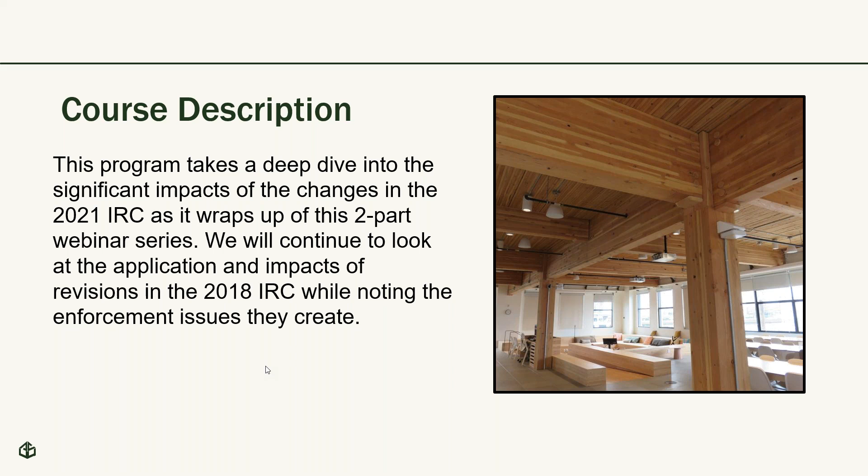Now, one thing about the splitting of these presentations is we actually did talk about ESS, our energy storage systems, things related to electricity, and all of that. We're continuing on with that. This happens, to me at least, to be one of the most interesting code changes I've ever seen in the residential code. As I mentioned in part one, I was the original drafting secretariat. I got to work with all of the committee members and the membership in the development of the 2000 edition. And this particular item kind of steps outside, to me at least, the scope of the International Residential Code.

We are talking about using electric vehicles to power dwellings, certainly in the event of an emergency. I wouldn't believe that it would be on a regular basis. But if there's a power outage or something happens to the grid, to the supply that comes into the dwellings, we can actually hook up our electric vehicles and run our homes for a period of time. I have talked with people about how long that is. Like I said, this is very interesting to me to see this in the International Residential Code. But people mostly fall on about 3 days, depending on the load that the dwelling has. Could be more, could be less, depending on the drawdown that each dwelling has, depending on all the appliances and everything that uses electricity. Very interesting to see this.

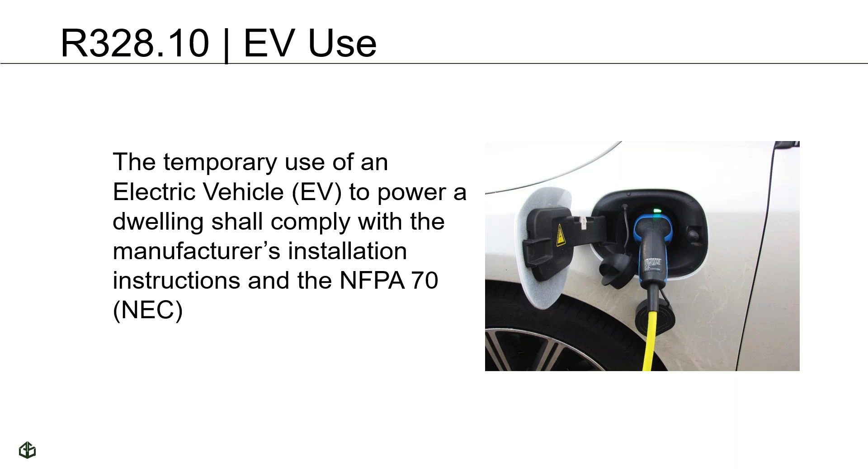Like with any sort of appliance or piece of equipment, we have to make sure that we are complying with the manufacturer's installation instructions and, of course, the electrical code, NFPA 70. The industry has done a lot of work, as we mentioned in the last webinar, on including energy storage systems and other sorts of criteria in the residential code and in other codes now. And we have that available for us to use. People can now, based on this particular code, use their electric vehicles in a different way to actually power their refrigerators and whatever else they have in their home that runs on electricity. Very interesting to see this.

Continuing on with our energy storage system, this is kind of a funny one to me. We've had more of this occurring through the codes where we actually have to have a copy of the manufacturer's installation and operation and maintenance criteria, but not only that, but how we can decommission these systems, provided to the owner. And then it does say, or placed in a conspicuous location close to the energy storage system. That's actually the wording out of the code. We don't know what that means. Conspicuous location means different things to different people.

So we're going to have to see these types of documents hopefully get into the hands of the people that are going to be using these systems and hopefully maintaining them moving out. The other thing that this particular code section does is it also requires a label on the energy storage system itself of contact information for qualified maintenance and service providers. Could be singular, even provider. It doesn't say who that is, doesn't say what qualifies them to work on these particular systems. It just says that they have to be qualified.

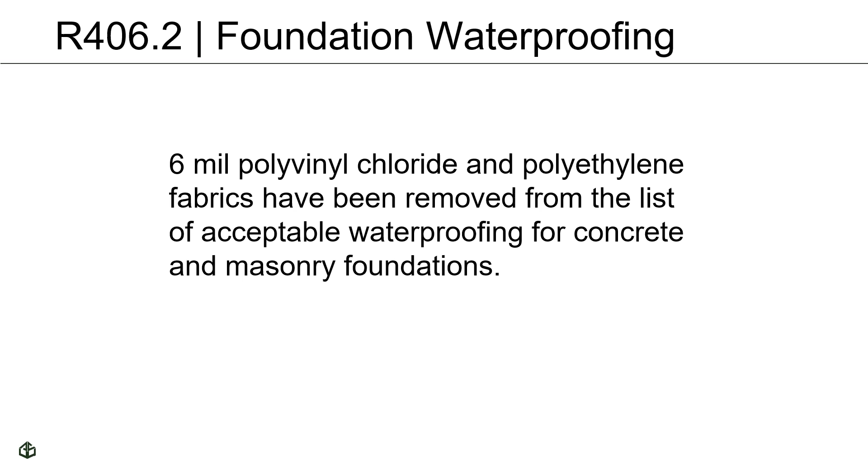Here is another very interesting code change, and as I said in the first part, I find all code changes interesting, so bear with me. I'm sorry if I use that term an awful lot. This one is one that's going to be a challenge, I think, certainly for our contractors out there, and I hope they know about this.

But the 10 mil vapor retarder underneath concrete slabs is now the requirement. Previously, it was 6 mil. So we're actually increasing the thickness. We get that, and we have the standard lapping of the joints and all of that. But there could be contractors out there that have a stockpile, probably not a ton, but I'm sure they have quite a bit of 6 mil types of fabrics that would be placed as vapor retarders. So what can they do with that particular product? 10 mil is the minimum.

Well, in talking with people and going through the code development process, what was found is that they can double up, obviously, on the 6 mil. We asked if 2 layers of 6 mil could be used and would actually get the performance underneath our slabs that we're looking for, and the answer was yes. And so when you go out there, inspectors in the field, and someone is using a 6 mil vapor retarder, you can just say, the code has changed. All you need to do, though, is double up on the 6 mil and you're in good shape.

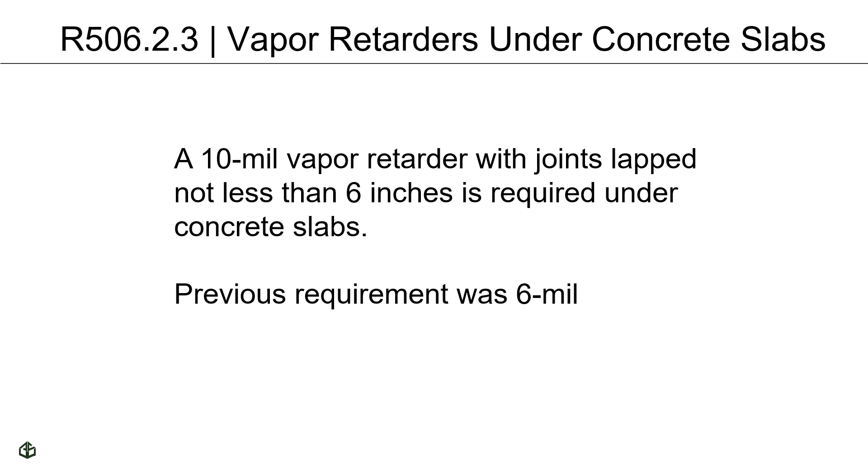Deck loads. You will see that there are a lot of code changes related to changing the criteria for the construction of decks. The prescriptive criteria in the codes has been around for some time. We started to specify deck construction not too long ago, and we've had to change certainly some of the loading criteria, some of the other criteria that we apply to the construction of decks, because this is one of the most popular types of projects that are out there, certainly for homeowners to do on weekends with friends, what have you, is to construct a nice new deck serving their dwelling.

Well, we have new loading criteria that we have to deal with. This particular slide applies to footings, but the design of other criteria is based on a 40-pound live load or 50, 60, or 70-pound ground snow load. Well, that's great, and we have lots of tables, lots of prescriptive criteria to take a look at in this regard. However, we do know that some jurisdictions have increased the live load for decks and balconies based on a perceived lack of performance of those particular elements.

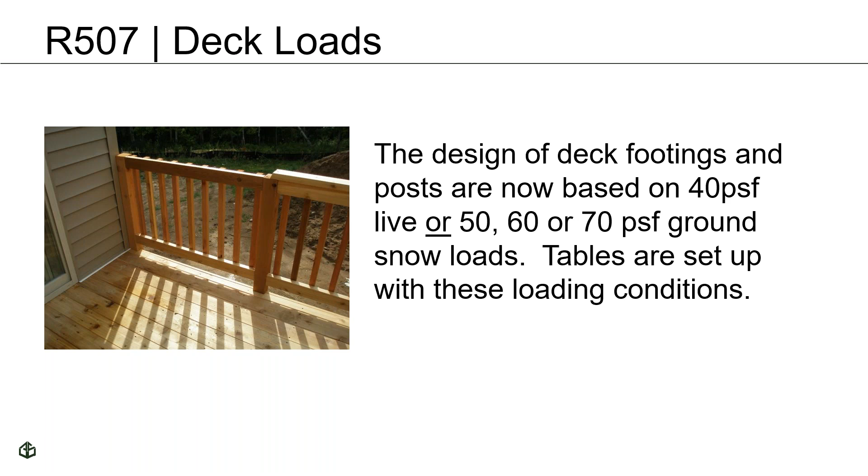Deck posts. We were looking at the footings, we're moving up in the construction, we're at the deck post now. The table for deck posts has been added, very nice to have in the code. We have almost, I think, a complete set of prescriptive criteria for the construction of decks now. Very, very handy. It is based on the loads that we just talked about, so we're going to have to take a look at that too, although the posts, for the most part, shouldn't have that much trouble, but we're going to have to evaluate that as well moving on into the future.

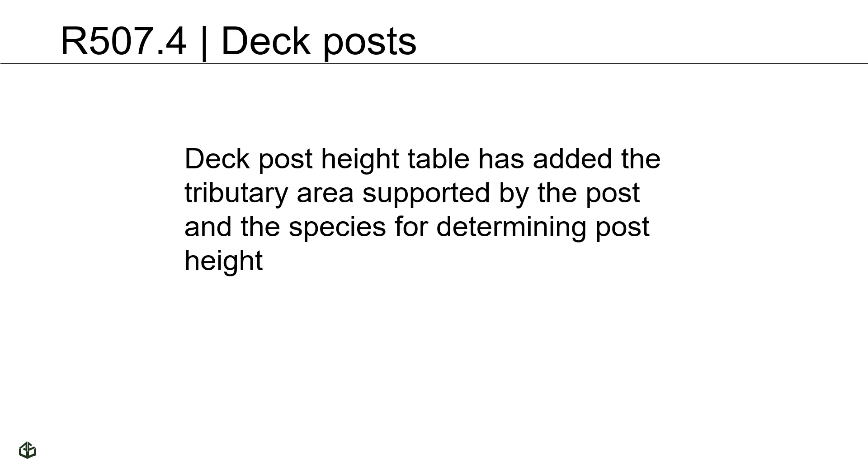One thing I forgot to mention, certainly for the jurisdictions out there, is if you have or want to have a handout for the construction of decks, you should really take a look at this particular section, section R507, and either amend what you have now or build it into a handout. There's a lot of jurisdictions out there that have handouts for deck construction. So there's really not that much that's new under the sun. You can reach out, talk to them about maybe getting a copy for yourself.

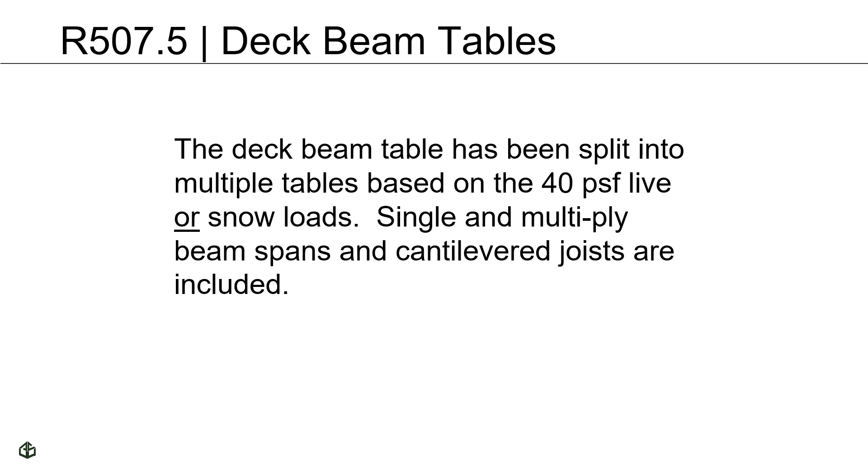And then you can put certainly your jurisdiction's logo, letterhead, things of that nature on there and make it your own and put it on your web page for people to use moving out in the future. Very, very handy to have that. There are some jurisdictions, like I said, that go to a lot of effort to create all kinds of handouts for people to use.

Deck joists, okay, we have more options now. We've got the ability to have greater cantilevers over the beams. A lot of work has gone on with this. There is an organization that represents groups or contractors that build decks, balconies too, presumably, but decks more specifically. And they've been very involved and done a tremendous amount of work on this particular criteria. And it makes it very easy, again, for people to use.

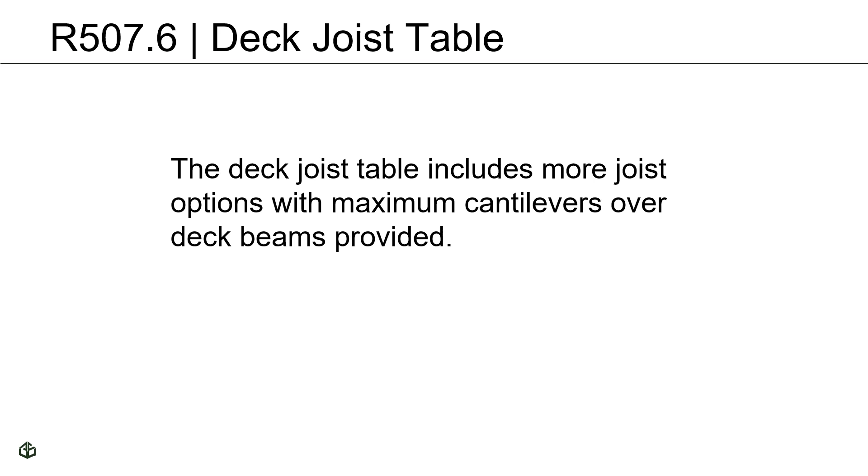And then the decking, okay? The decking table has been updated. We've got a nice set of criteria. I think it's a little more clear to use now. We have single and multi-span configurations, and then we can also use diagonal decking. Not everybody wants to have their decking perpendicular to the joists that they have built into place. And so we can actually have a diagonal pattern built into these decks now.

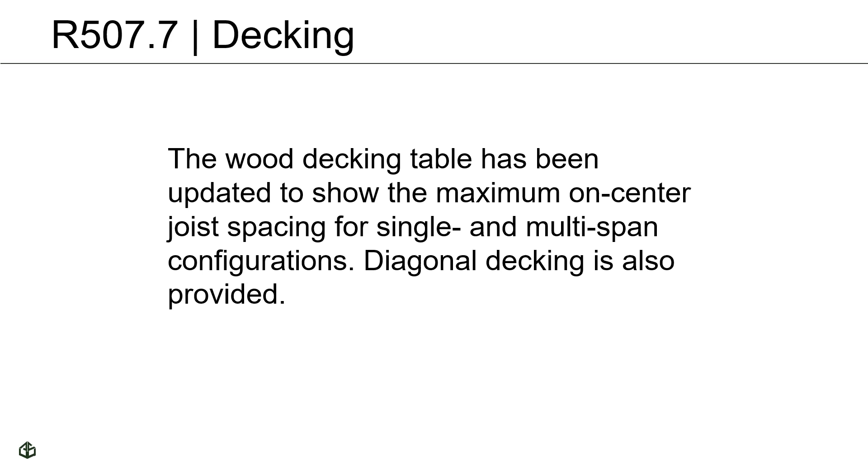Again, they're adding more and more to make this decking criteria much more usable for people building decks, certainly for the homeowners, I think, and for those framers out there that are building decks prescriptively. Here is one of the tables in particular, some criteria related to the maximum joist spacing. This is specific to the decking material. You can see that we have 1 1/4 inch wood and we have 2 inch wood as the decking material that can be used. And then, depending on the application of the decking itself, you can actually create the actual structure of the decks that you're building.

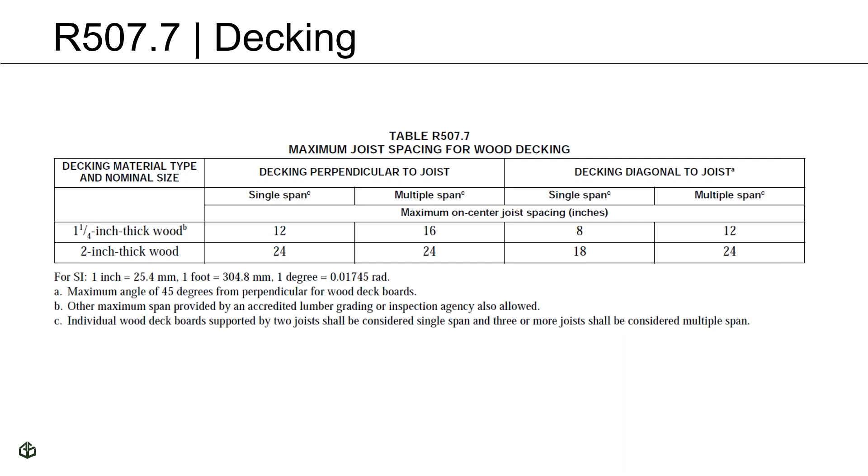And then I think this might be the last slide on decks, section R507.10. We even have a section for our guards. I used to say guardrails, but it's more than that now. And this particular section has been included to provide criteria for not just wood, but for our plastic, composite, and other types of guard material that are used out there. I try not to use manufacturers' names when there are other manufacturers out there for products, but you know who they are. We're starting to see people use those more and more for deck construction because they hold up pretty well out there in the exterior environment.

Okay, we've moved out of chapter 5, and we have basically 10 chapters that we're going to talk about today, plus a few appendix chapters. So we're moving along, and we're doing actually very well, I think, certainly for our particular webinar here.

As I mentioned before, industry groups have been constantly evaluating the performance of all sorts of criteria in the codes based on their particular product. This is for wood construction, obviously, and I'm with American Wood Council, so we're very interested in this, and our people have done a really good amount of work bringing in the additional types of connections or fasteners, if you will, that can be used for roof and wall construction.

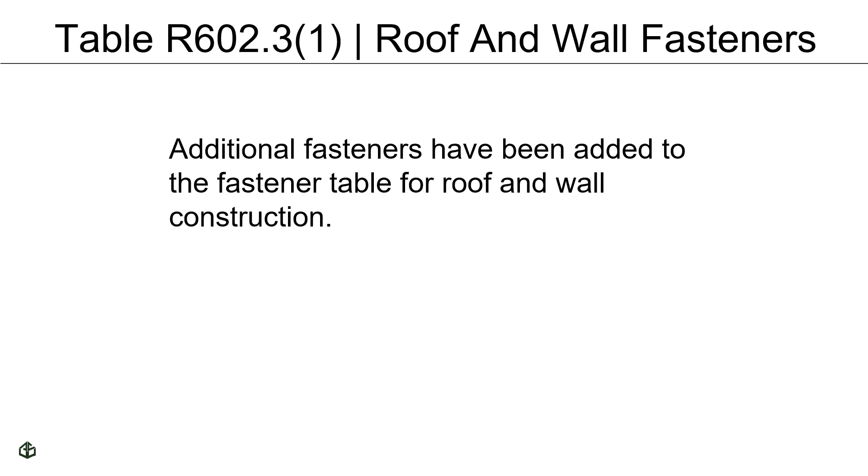Here we are. Okay, you can see here's some of the changes and all of that. We've actually built in, certainly in this case, our 3/8, 1/2-inch wood structural panel type of fastening situation with, in this case, nails or ring shank nails, things of that nature, and we can just have more flexibility in the types of fastening, types of connections that we need to create wood structures.

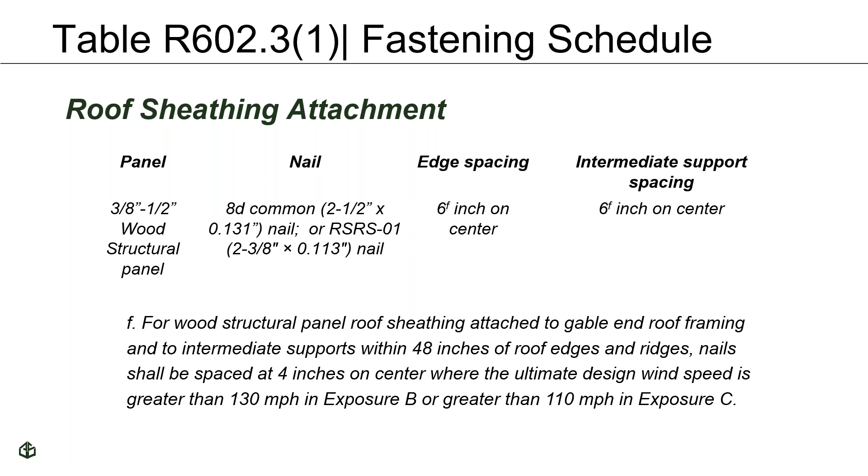Here we have another one, item 12 in the table itself, adjacent full height stud to the end of the header. You can see this is a box header, a built-up header, that kind of a thing. And we have prescriptive criteria in this particular slide that is found in the code. Unfortunately, some of the formatting of this slide got a little bit funky under the nail section, but each of those items are the fastening, if you will, condition that can be used for this particular situation that we have in front of us, the full height stud to the header.

Okay, so you can use 4 16-penny box nails. You can use 3 16-penny. Hopefully I said 16-penny for the box nails. Common nails too. You could use 4 10-penny box nails or 4 3-inch, basically, you can see the diameter of the nails themselves. And so we have all of that listed there just in case you have those much more available than other types of nails. And you can see the location is called out in the spacing location criteria. It's an end nail kind of configuration.

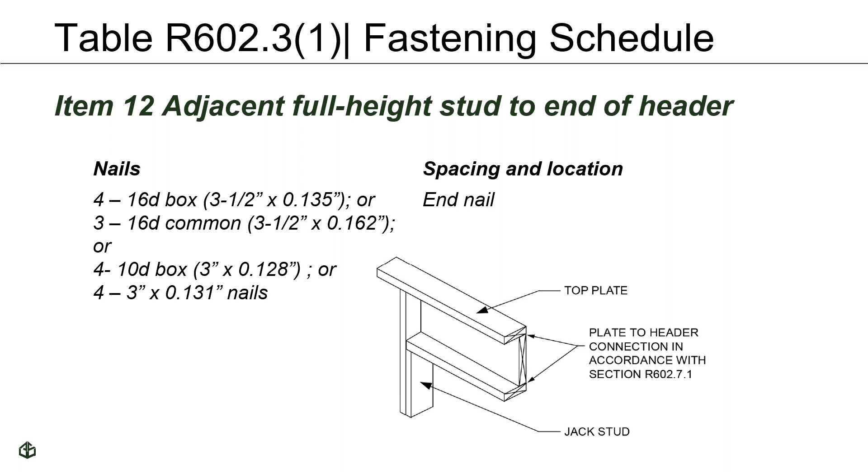This really brings up an interesting point. If you're planning on or you're about to take any sort of certification exam through ICC, whether it's based on the residential code or the building code or what have you, always, always, always be familiar with the footnotes. These certification exam members, they meet and they like to make you think a little bit. Okay, they want to make sure that you know what's going on. And so they frequently will use a footnote, maybe a caption or whatever, as part of the answer to the certification question that's in front of you. Okay, so always, always, always study, at least read through the footnotes, be familiar with what they are so you're not tripped up on any particular exam question.

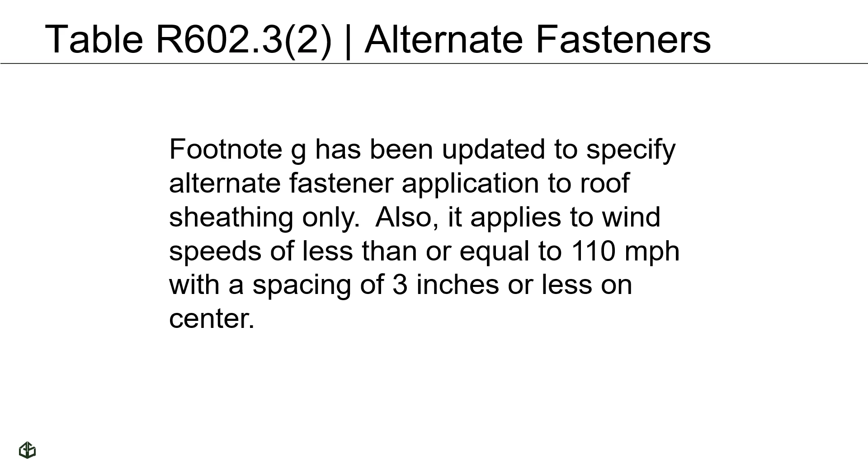Cripple walls, again, in that second line, you can see there's that C word, clarified. The criteria applies only to exterior cripple walls. Interior cripple walls, you know, we have some criteria for that. We don't have to worry nearly as much on the interior application, because in most cases, the exterior walls are load-bearing walls, right? And this applies to continuously sheathed walls that are less than 14 inches tall. They're cripple walls, basically, that are less than 14 inches tall. Okay.

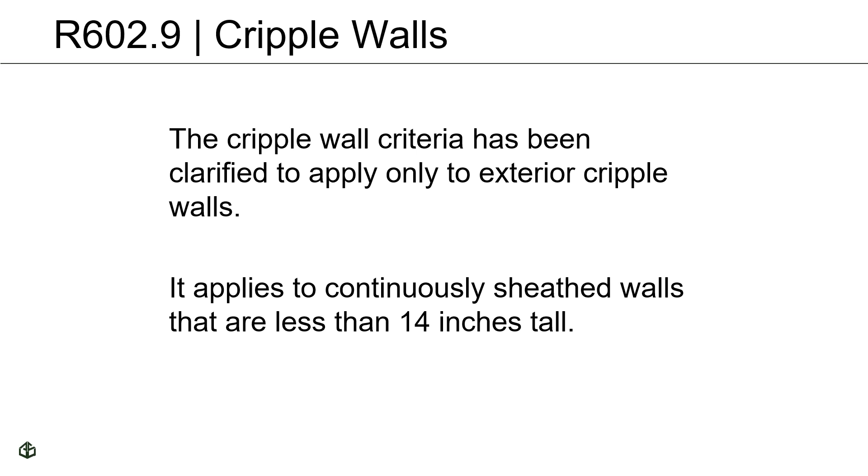Brace wall lines. We've moved in really to our lateral force resisting system for wood frame construction. This criteria has caused certainly the plans that are developed for the prescriptive construction of residential buildings that are scoped under the IRC to become much more detailed, so that we can understand that they do comply with the code, right? The code has been, I think, clarified, because in the development of it, the simple idea is that you would have on a given brace wall line half of the required brace wall panel length on one end of the brace wall line and the other half on an opposite end. Okay, well, the code wasn't that clear on that, and so people even combine them into one area.

Now we have a limitation that says no more than 2/3 of the required brace wall panel length can occur on one end, really, of the brace wall line versus the other. So you can have, obviously, if you just follow the simple math, 2/3 on one end and 1/3 on the other. I still like the 50-50 rule myself. It's simple. It's very redundant. It really makes for, I think, a solid building myself.

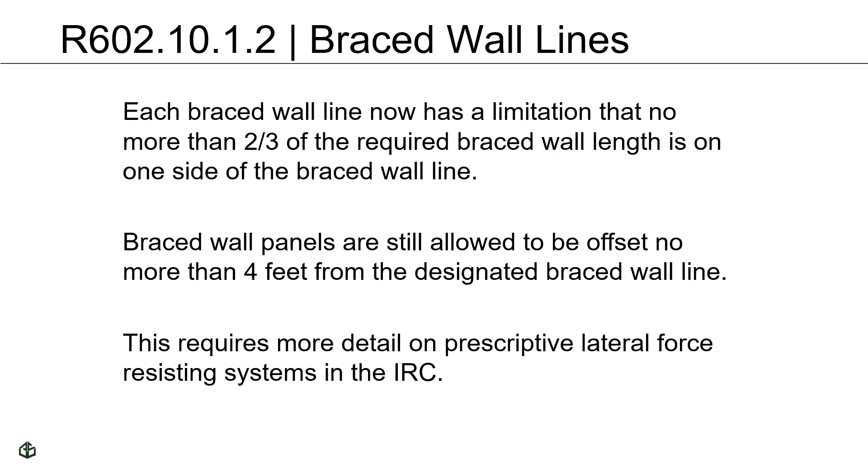Continuing on with that, we're still within the lateral force resisting criteria. The use of seismic wall bracing. Obviously, we're in the higher seismic design categories with this. We have conditions that cause us to evaluate whether or not you can use prescriptive design for these residential buildings. One of the things that has been eliminated is the prescriptive limitation on the project being in Class D soil. They pulled that out altogether. As a building official, building inspector, plan reviewer, what have you, we no longer have to ask for that. A lot of the people who, frankly, are designing these projects may not know what the soil classification is. And so they pulled it out and made this criteria apply to all.

Now we have 2 new footnotes that have been added. For our portal frame methods or our alternate brace wall methods, we have basically clarified again or provided a further limitation on the use of the 2 portal frame methods or the alternate brace wall method to a single story building or the first story of a 2-story building. Can't be used in 3 stories, right? And we have to be very careful about its location in a 2-story dwelling. Single story, no problem. And then we have this very interesting limitation in footnote H.

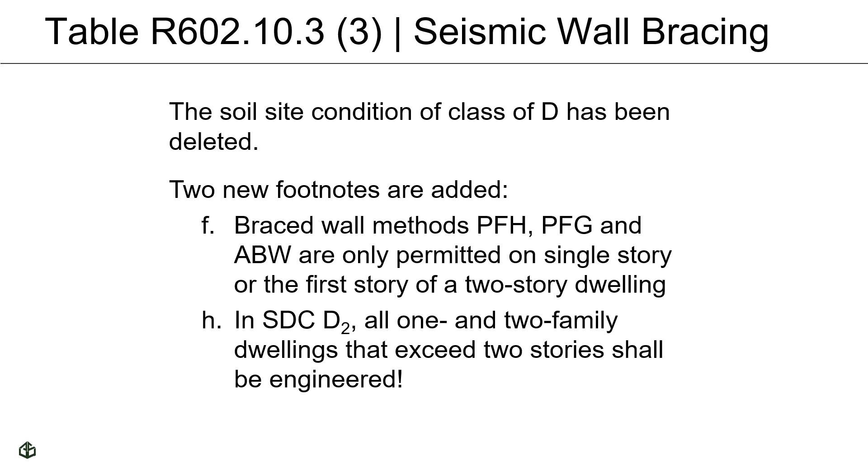To me, this is a funny one in chapter 6. I get that we have the criteria in there, but why we have garage doors in the wall framing chapter is always an interesting thing for me. But anyway, we have this criteria in the code. We now have, and this is new criteria, a requirement to have permanent labels on garage doors. You can see the picture here. It looks like a nice roll down door, probably has some sort of garage door opener too. Very nice dwelling that it's part of. But that permanent label has to have a lot of information. So we have the wind pressure rating, and we understand why we need that.

Wind plays havoc with these light doors. Okay. Along with that, we have to include the door manufacturer. Okay, we understand that. They're going to want it there. The door model and series. Okay, we're starting to get a little more specific information on this label.

And then we need to have the installation instruction drawing reference number. The plan sheet or the drawing that is used by whoever's installing these garage doors, that number needs to be included on the label along with the applicable test standards that were applied to this door. That is a ton of information.

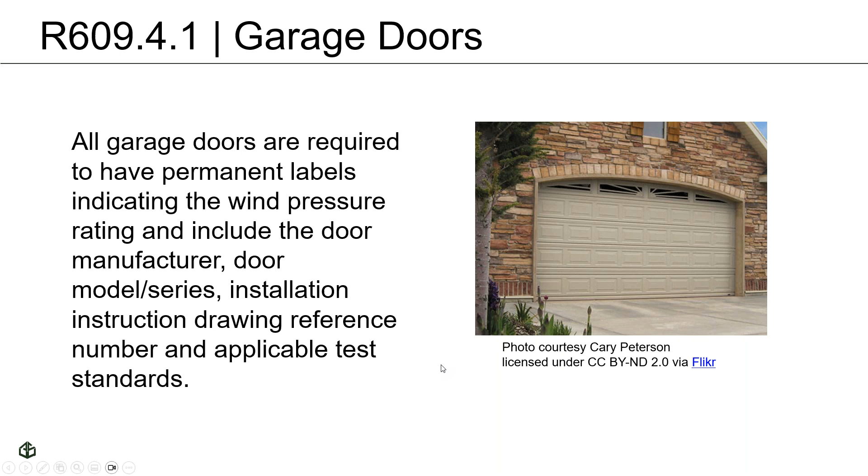I'm going to take a break and stop that. Okay, sorry, Marcy, I'm back.

This criteria, along with some other criteria that we'll get to in a little bit, has really had a lot of industry attention to make it easier for us to use. And so the entire section has really been clarified. And when we get to the water resistive barriers itself, you'll see that it's really been clarified into just very simple climate zones.

And here it is. WRBs, water resistive barriers. Like I said before, there's been just a ton of work on this. We have the criteria in both the residential and the building code. The industry itself, the home builders and others have been very interested in getting this much more easy to use. And we've really clarified the application of the criteria into two different climates.

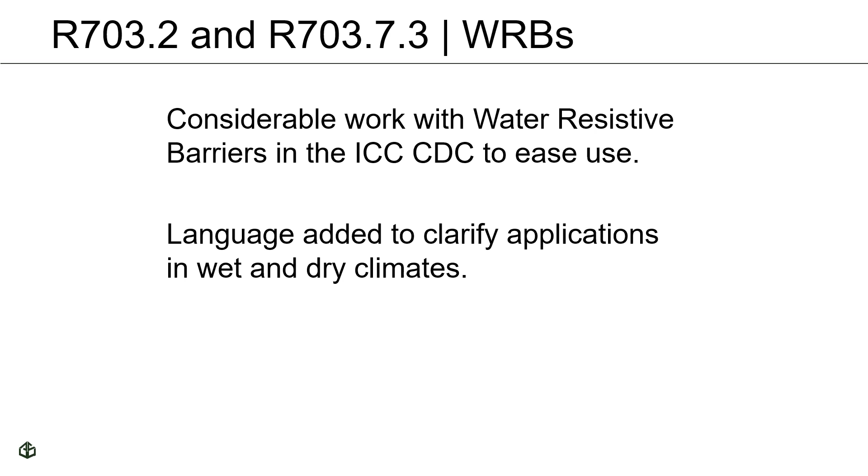We've moved on into chapter 7. Chapter 7 is our exterior wall finishes. Basically, we're talking about veneers here. Been a bunch of work, clarifications really. We're now allowing larger air gaps because, based on our energy codes and other types of considerations, we have thicker continuous insulation that's being installed. And so the code has to adjust. There's new footnotes that have also been added that address more adjustable types of fasteners or attachments to the walls too. There's all kinds of changes seemingly every year that pop up in this industry, and all of this gets included in the code in one way or the other.

And again, it makes it much easier for us to build, much easier for us to design and enforce the codes, but there's a lot more information to deal with. So know that the industry groups are out there to help you. Please reach out and ask them whatever question comes up.

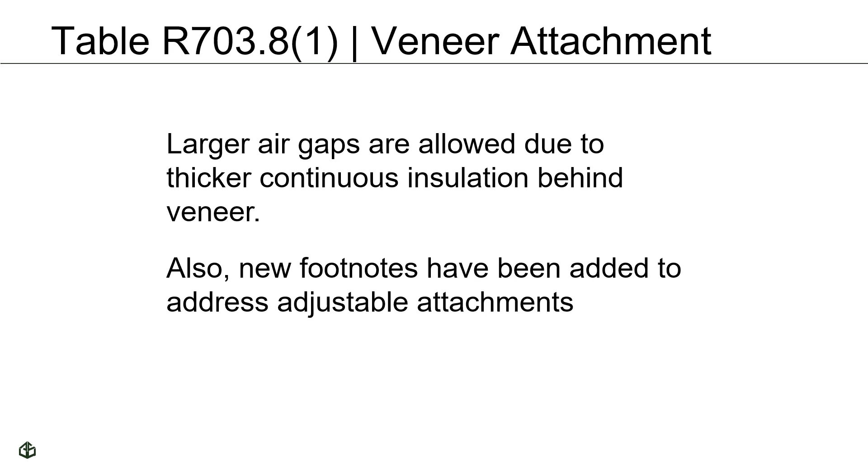Vinyl siding. There is a Vinyl Siding Institute, and there's been a lot more research done, certainly on wind speed types of concerns related to the application of vinyl siding. In this case, some of the wind pressure ratings for vinyl siding have been reduced, actually. Now, it's the application of the criteria for the vinyl siding that changes then. We don't have engineering involved with this. It just says the reductions then apply to the vinyl siding, and then you have to use the appropriate fasteners, the appropriate type of application process, right? So we have that here now.

Again, like I'm saying constantly, there are industry groups that are very, very involved and are evaluating the performance of their particular products that they have control over, so that we, dealing with these products out in the field, either design, construction, enforcement, what have you, can have the best criteria possible for the best quality of construction ultimately that we're looking for.

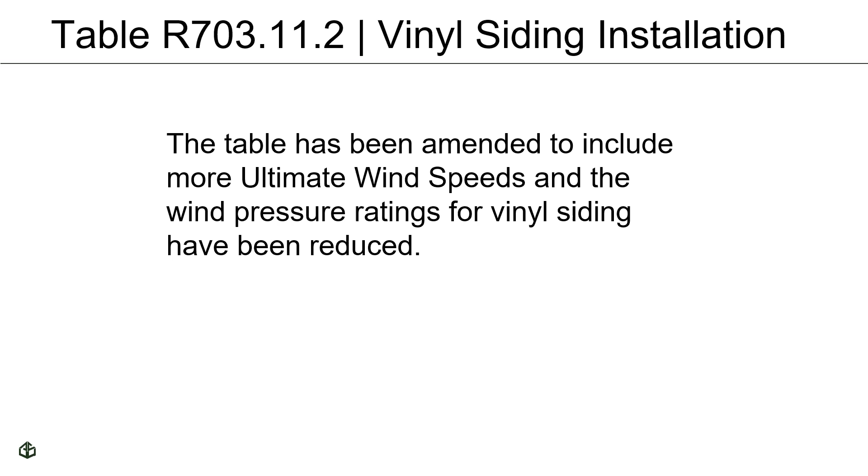The soffitted areas are getting more research, and American Wood Council is doing research in the construction of soffits, their performance, and all of that. And we should have perhaps a better idea of the performance of soffits in at least testing environments that are going to be out there in those wildland fire areas. Obviously, wildland fire is a huge concern now for the United States, not just California. But given the wildland fire that occurred on Maui in particular, we're going to see, I'm sure, more evaluation research done on the performance of buildings.

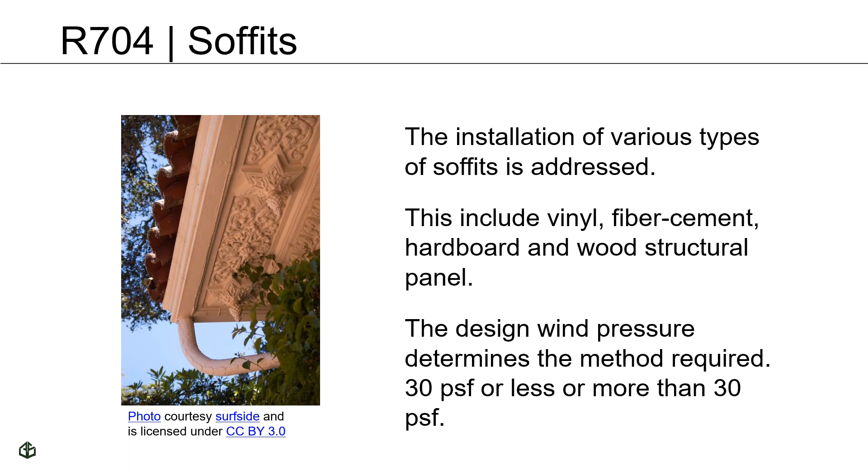Chapter 8, we're getting there. Ridge design, we're in the wood framing criteria in section R802. Whenever you do not have continuous ties provided by ceiling joists or rafter ties, things of that nature, we do have a concern with the ridge board, the ridge of the roof itself. So either that ridge board has to be supported on a wall, or again, here we go, we're actually pushing that ridge back into an engineered solution.

Like we had with certainly the seismic wall bracing, we're starting to see more references in the residential code to engineered solutions. Okay, watch out for this. I just see this as really causing the installation or the framing of more rafter ties when you want to have a more vaulted ceiling in whatever project you're working on residentially, or just the standard ceiling joist too, to have that continuous tie. I think it's going to encourage that more than anything else. So it's very interesting to see this.

To me, again, the 2000 edition of the residential code had no engineering references built into it, other than saying the residential code was scoped to 1 and 2 family dwellings in townhomes that are 3 stories or less in height.

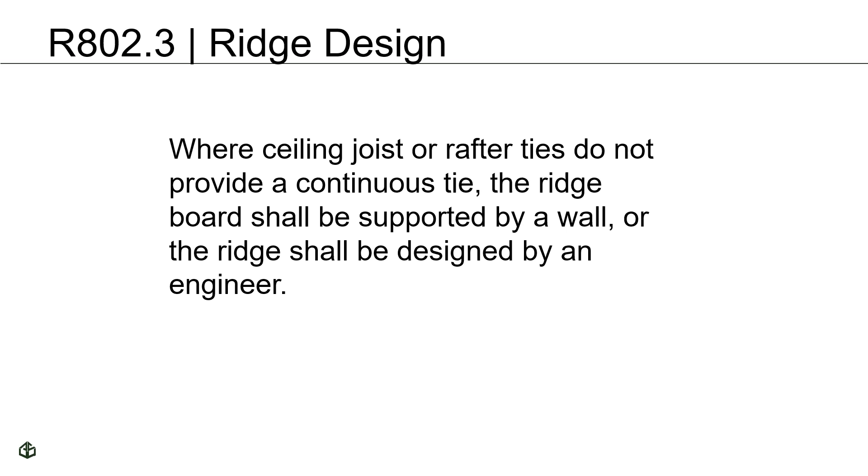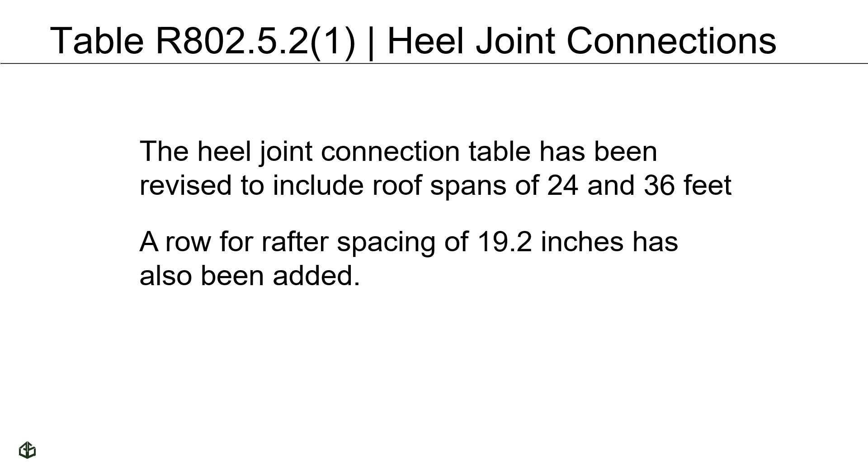Heel joint connections. We've expanded the heel joint connection table. We're including the 2 roof spans that you see there, 24 feet and 36 feet. Now we understand that we need to have those in the code. Again, based on questions, based on concerns raised, we expanded the code. We put the code change in there and have gotten the ICC membership ultimately to agree. Also, a row for the rafter spacing of 19.2 inches has been included as well. So we're trying to respond to the concerns that are raised and provide that information in the building code itself.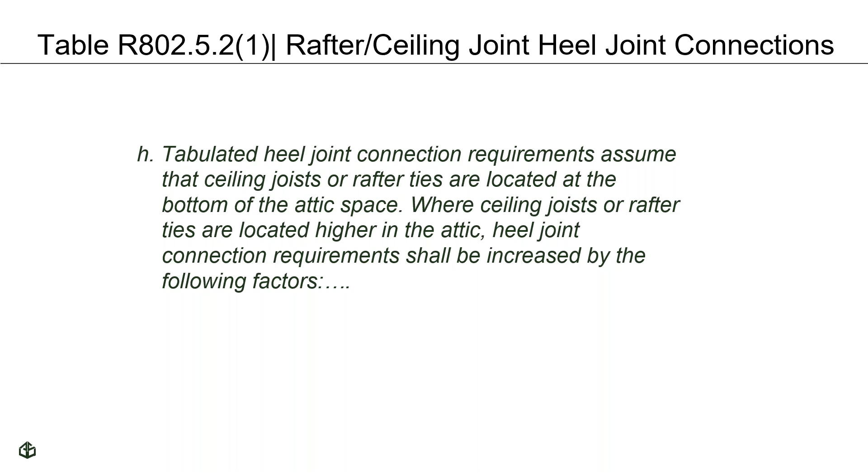Rafter and ceiling joist bearing, it's amazing the amount of detail we're going into the code now from a framing standpoint. This section, as you can see here, really is stepping into the bearing of the rafters in a steep slope type of roof design. We can now have prescriptively called out in the code the bearing criteria for the rafters on the plates that are supporting these rafters.

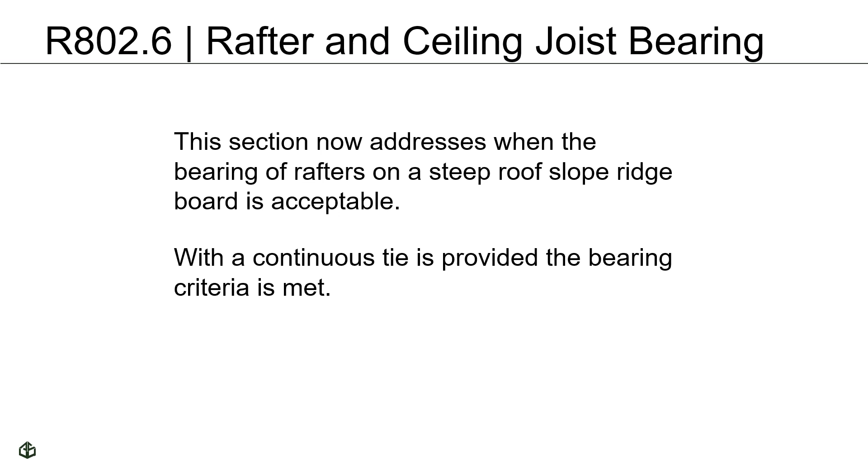When we have the continuous tie, again, the bearing criteria is met. You have the tie that provides that as well. But we have that in here. It's a very fine detail that has been built in. And it, again, responds to concerns that were addressed to us and to others on this particular framing situation.

Section 804, table 804.3, CFS is cold-formed steel. That particular industry also has been very actively evaluating their products, trying to respond to concerns and questions that are raised. You can see that there's a new item listed in this table for the gypsum wallboard to cold-formed steel ceiling joists. And you can see that we've got a fastening called out here: the number 6 screws at 12 inches on center as being an acceptable fastening arrangement for this configuration. Again, the industry has been very, very active in the code development process.

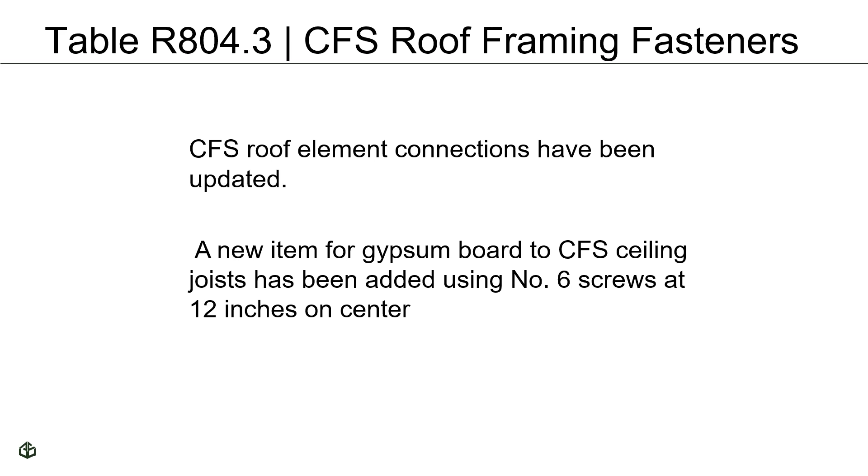Chapter 9, metal roof shingles. As with any roofing product, while there are all kinds of loads imposed on exterior elements, wind in particular is a problem for roof shingles. There has now been a table added for metal roof shingles, and the table talks about the application of the metal roof shingles to various roof configurations. Again, there is a roof contractors association, the National Roofing Contractors Association, that is very involved in the research and evaluation of their roofing products. And so that's what they've done here.

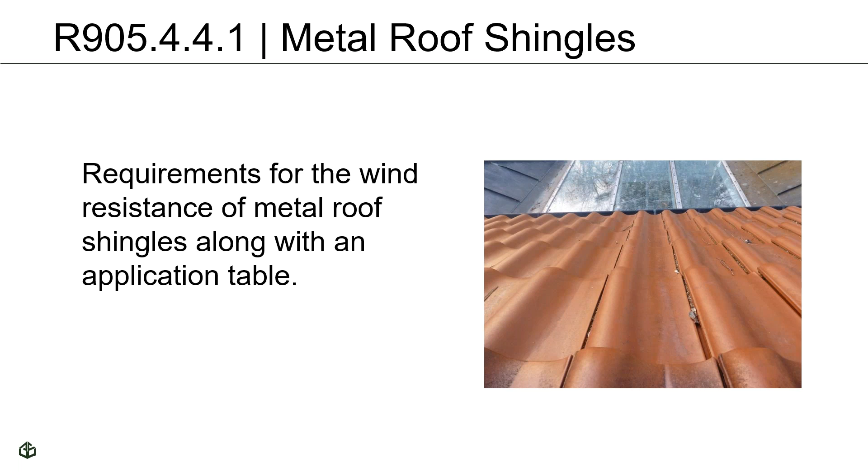Okay, we've moved on along, and we are in our reference standards that have been added. These are our wood standards that we have brought in. Just so you know, every 3 years, there are a lot of new standards and certainly a ton of revised standards that are referred to in all the codes.

For those that enforce the code, you better take a look at your state enabling legislation for adopting and enforcing codes, because some of them say that you need to have these codes available or at least accessible in some manner for people who have questions related to whatever is covered by the codes. You can see that we have these codes here. You can see that the first one is our span tables. We have the 2021 edition for our joist and rafter span tables referred to now.

So, again, industry has a lot of standards that they are the secretariat for, and they are constantly having their committees go through and evaluate the performance of those standards. There are also new technologies, new issues that come up that need to be built into these standards, as we have with the codes as well. So that is what the American Wood Council has done with pretty much all or most of these. There's some plywood here that's handled by the American Plywood Association, the Engineered Wood Association.

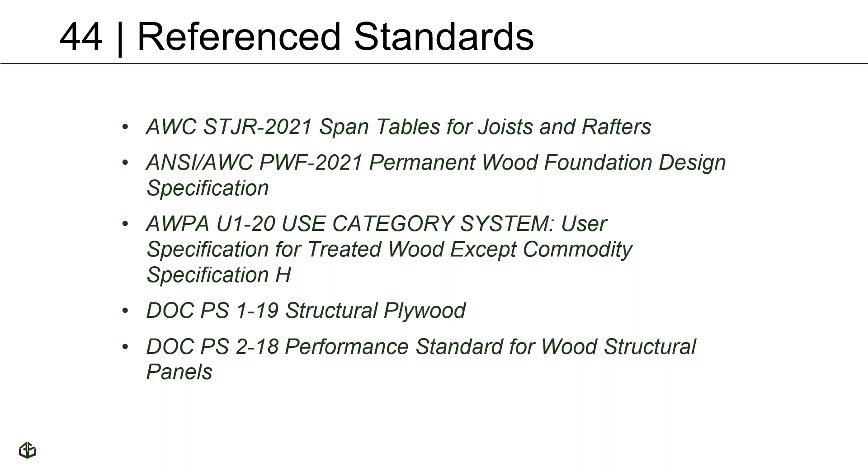Okay, we are moving into the appendices. There's a couple that are certainly, I think, more applicable than others. Radon testing is one that certainly applies to those areas that are identified as having a radon hazard across the United States. There is actually a table that calls out by county which counties have those particular hazards. The requirements for the testing protocols that are used to identify if there is a radon hazard on the given project or not have been added to this particular appendix chapter.

There is an exception that talks about an occupied space over an unenclosed open space, unoccupied space, not needing this kind of testing, because presumably, since it's open, you're getting a lot of ventilation, and the radon itself is being dispersed to the atmosphere. The problem that we have is that when the radon comes up through concrete slabs, or whatever type of area, maybe it's a raised floor that is not open, the radon can come into the house and cause some health issues for the occupants.

Nobody wants that, and that's why this appendix chapter is located in the residential code itself. And previously, we didn't have a very detailed way to test for radon. It is now in the code itself. If you have one of these areas, believe it or not, in California, there's one county that's identified as having a radon hazard potential, and that's Ventura County. It's very surprising to me that it would be Ventura County. But anyhow, that is identified for us.

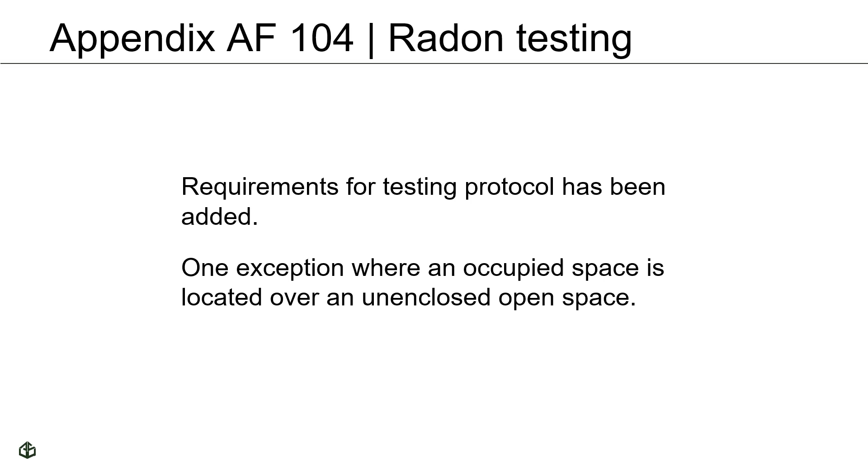And if the jurisdiction adopts this, or if anybody wants to test for a radon potential on a given project, you have the testing protocol in this appendix chapter AF. I always said F, but whatever. And we can use that then to move ahead. Some insurance interests are taking a look at this, along with lead-based paint potential for poisoning, and some are actually trying to get that test done when you have an identified area. So watch out for this. Know that it's in the back of the residential code.

Cob construction. This is not corn cob construction. That's the first thing that always comes to mind. Cob is actually kind of like an adobe, if you will, clay type of technique. They're much smaller than like adobe blocks or bricks, that kind of a thing. It's very similar to straw bale or light straw-clay construction, and it is a historic technique.

There are groups out there, there's people out there that want to use some of these historic techniques. They're very interesting to see go up. I have not seen the cob. I have seen the straw bale construction. It is interesting to see them in use. I'm trying to make sure that I get out there and see how they're performing, 5-10 years after the construction too, just to see how they're doing. But if they're maintained well, they should do well.

There is a group out there that has kind of taken on the responsibility of maintaining these historic practice kinds of framing chapters, appendix chapters. And they're based in, at least they were, in Arizona. But a lot of those techniques are being used in Colorado. Arizona is one. California out in the desert, we're seeing some of that.

Actually, I saw straw bale up in one of the higher elevation types of counties that's subject to snow. So it'll be interesting to see how that building continues to perform years out from the original construction. But it's very interesting to have this, and there are a lot of people that are interested in trying to maintain and keep these historic techniques alive too. So that's what we have here. It is new to the residential code, the cob walls. Again, it's funny how people seem to think that it's corn cob as opposed to a clay type of a product.

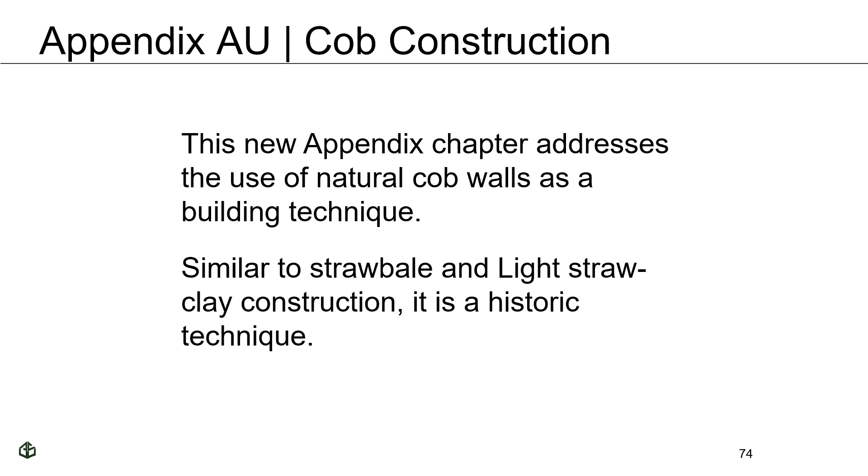There are demonstration projects that are going on here in California. The city of Pleasanton, I know, had a proposal last year to have this kind of a development be built. I haven't been able to follow up on it. Fortunately, we know that the organization has to be highly experienced and certified. UL 3401 is the certification for those organizations that are going to do this kind of building using a 3D printing technique. And they need to work with the building official on this. Okay, it's called out in the code.

We need to all understand how these buildings are going to go up, how they're going to be maintained, how they're going to perform, hopefully, moving on out in the future. The nice part about having that demonstration project in Pleasanton is UL actually has a good-sized office building with a lot of their technical staff very close to that particular city. Because this is a new type of technique for building buildings, there are a lot of special inspections that are required for this method. Okay, we need to make sure that the quality is going to be what we expect it to be.

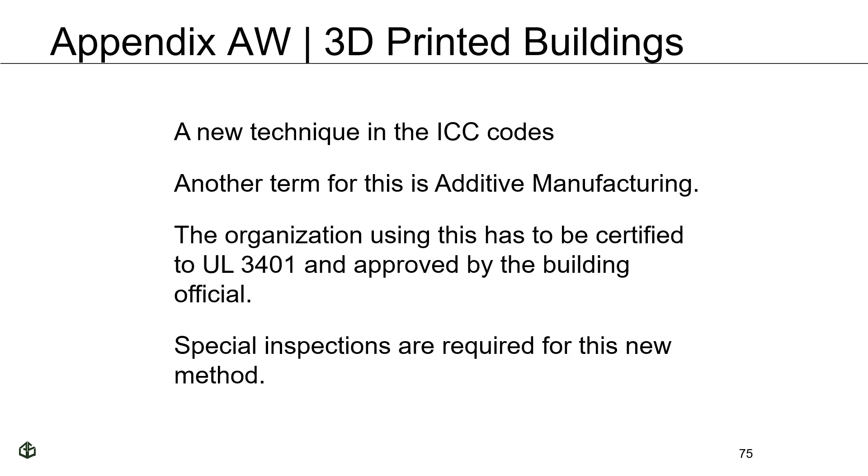Okay, that is the end of today's session. This is part 2 of the International Residential Code Significant Changes.